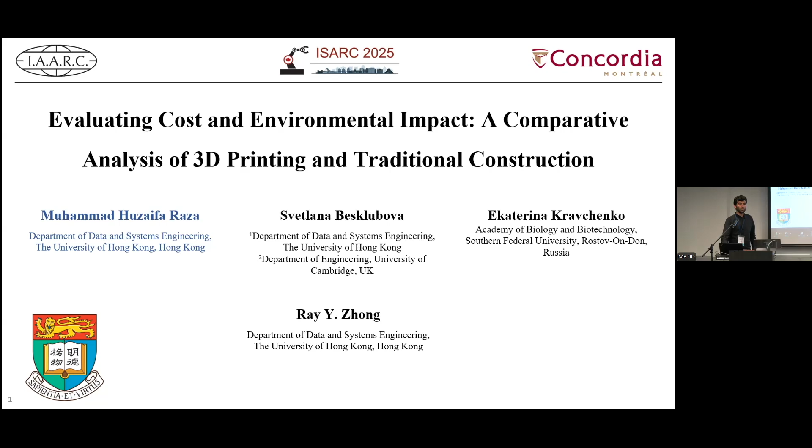Okay, the title of my presentation is Evaluating the Cost and Environmental Impact, a comparative analysis of 3D printing and the traditional construction. My name is Muhammad Huzaifa Raza, and my co-authors are Dr. Svetlana and Dr. Ekaterina and Professor Zhong. So let's move toward the contents of the presentation.

Generally, 3D printing is regarded as cost-effective and environmentally friendly. But the scenario is a little bit different when we consider the whole supply chain, starting from the raw material supply to the final construction and disposal stage. So that's why, apart from the other studies, we have considered the whole supply chain from the material supply to the final construction.

So the contents for this presentation would be the research background, the motivation for this study, research methodology, what kind of data we use and what kind of analysis we have conducted, a case study, where we have validated our considerations using a real-time case study, discussion of the results, then the futuristic scenario, whether it could be beneficial in future or not, and then the conclusion of the research.

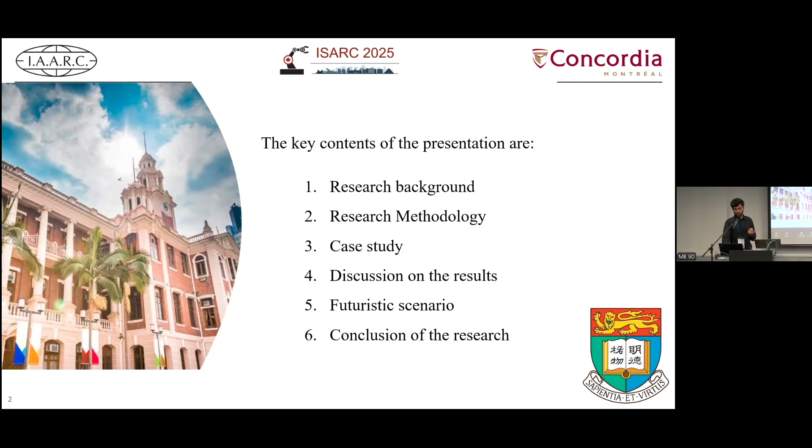So generally, why we are moving toward 3D printing is because traditional construction is cost intensive and even resource intensive. Like 40% of the natural resources are consumed by the construction sector, and nearly 40% of the GHG emissions are produced by the construction sector. So in this regard, 3D printing has the potential to reduce the cost, material consumption, and even the greenhouse gas emissions, as reported in previous studies.

So what are the benefits of 3D printing? It's the shorter supply chain, because it produces self-supported layers. That's why we don't need any type of formwork. The formwork also has its long supply chain, for example, the manufacturing of the formwork, then the transportation, then the assembling and disassembling process after the construction. So the entire supply chain for the formwork is eliminated in 3D construction printing. That's the clear benefit over traditional construction.

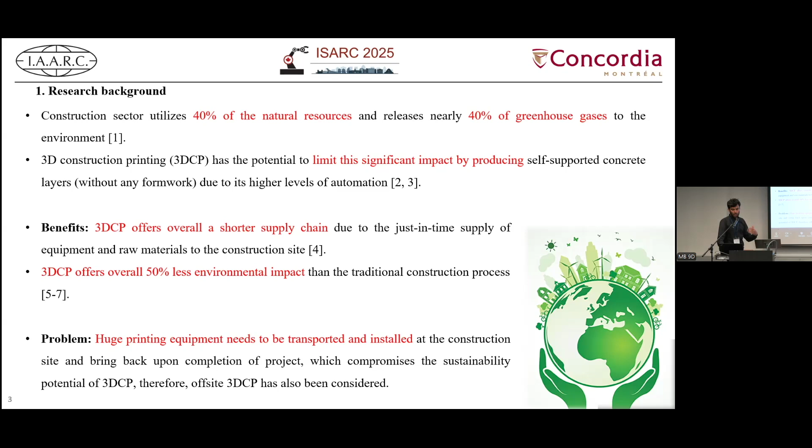But what are the challenges associated with 3D printing? That's the transportation. For example, if we have to construct a small house or small structure on the construction site, we have to move the entire setup for the 3D printing, assemble it on the construction site, and after the construction disassemble it and transport it back to the constructor's site. So keeping in view these challenges, we have considered the entire supply chain, starting from the raw material up to the final construction and the waste disposal phase.

So in this case study, we have considered two cases. One is the traditional construction. Here you can see traditional construction is quite smooth; it has only one-way transportation. But when we consider 3D printing, we have two-way transportation for the equipment and one-way transportation for the material. Why? Because, as I discussed previously, after the completion of the construction we have to move the entire 3D printing setup back to the constructor's site. So this is the whole supply chain that we have considered for the comparison of both cases.

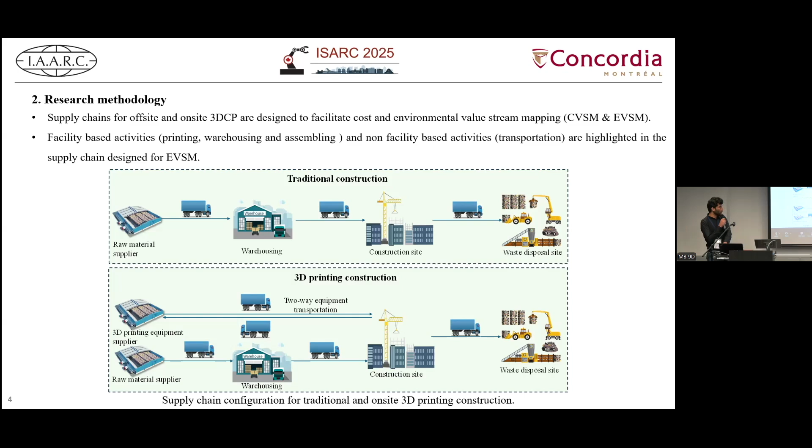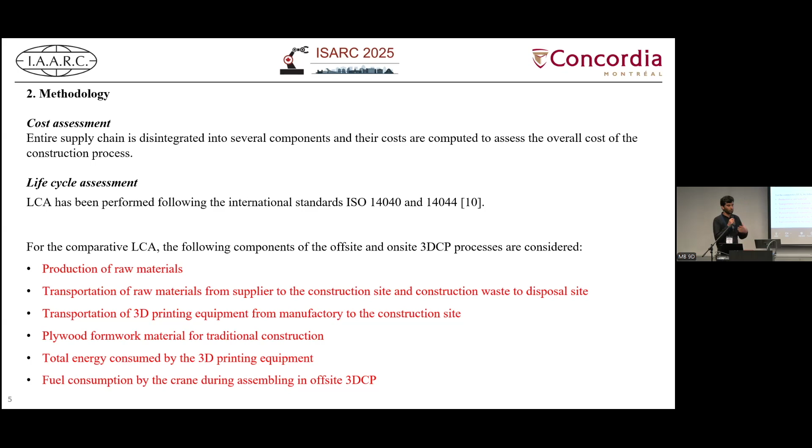So considering the entire supply chains for both, we're going to perform the cost assessment for both methods and the life cycle assessment. For the life cycle assessment, we have considered the production of the raw material, the transportation of the raw material, transportation of the equipment and back to the supplier, the amount of energy consumed, and even the fuel consumed by any type of equipment used during the 3D printing.

Here's the 3D printed house that we have considered as our case study. And we have also considered the same type of house, also built in Germany, that has nearly the same area, but a different amount of material is used because that method is totally different. So that's why the material consumption is totally different.

So this is a two-story building that was constructed back in 2020. This project was supported by different stakeholders: design firms, the material supplier, the equipment supplier, the construction firm, and even the research institute, Technical University of Munich.

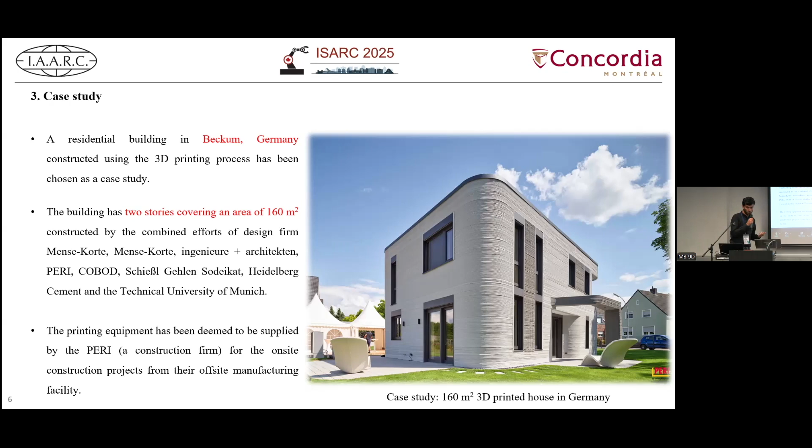So considering how we collected the data: first of all, we segregated the entire supply chain into the different phases, for example, raw material supply, transportation, construction, and then disposal. So we have segregated each process into several sub-processes according to the existing research.

And then we collected the data through questionnaires from the operational level employees of the project. Then we had follow-up interviews to fill in the missing information that we needed. So here's the information: a small portion of the information we collected through the interviews, and some of the information we collected from online sources.

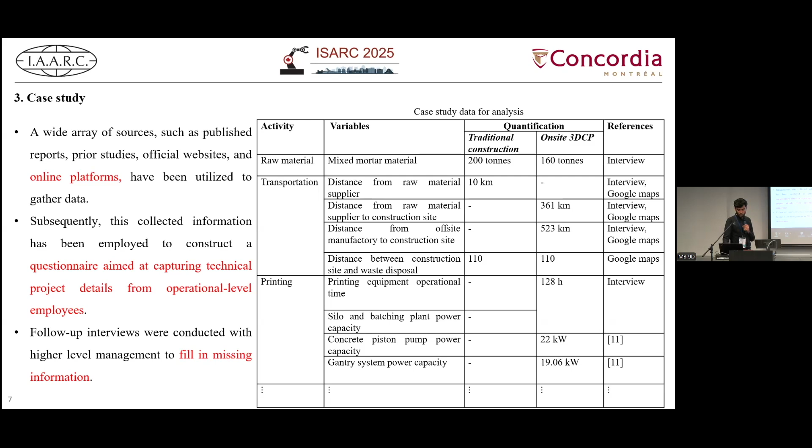We have provided the references because some of the data is commonly available, for example, the power capacity of the equipment, and the distances can be measured through Google Maps. Actually, we collected the data for the locations, and then we converted them into the distances for the raw material supply and others. So here's the results.

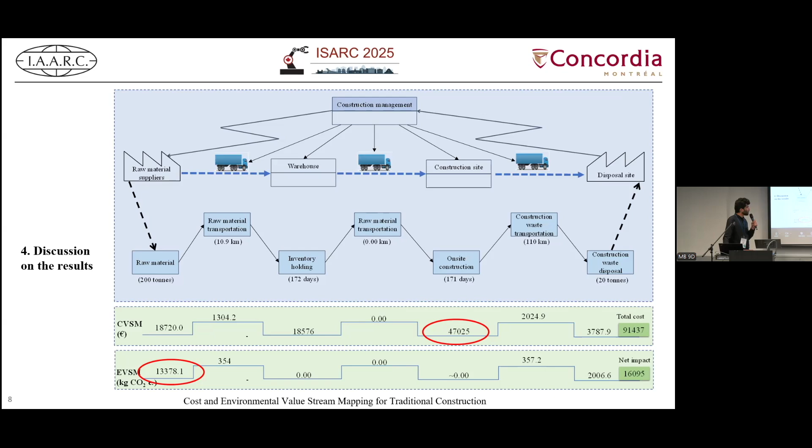The reason is that it's a small scale construction, a two-story house. When there is a small scale construction, we don't use heavy equipment, so most of the operations are performed manually. That's why the cost is quite high, but the environmental impact is quite low at the construction phase. But when we consider the raw material phase, a huge impact is created by the material used. This is the case for traditional construction.

So there are a little bit different results in terms of 3D printing. Here you can see the potential impacts are created by the transportation, because there are huge distances involved, from the material supply and the equipment supply. That's why the impact and the cost are too high in terms of transportation.

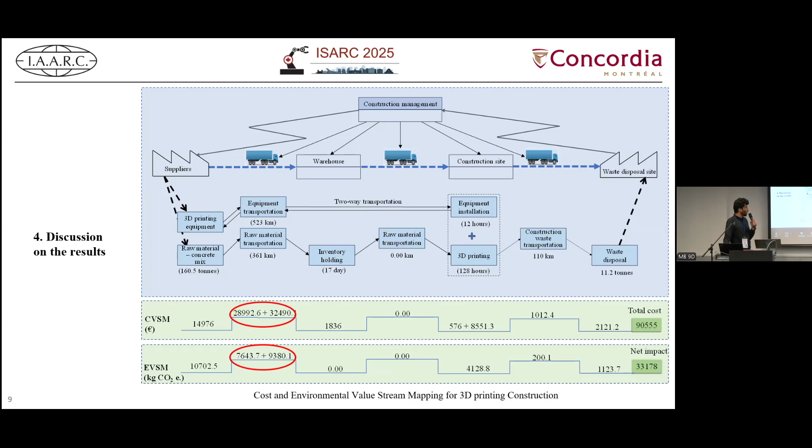So here we consider a futuristic scenario: whether it could be beneficial if we reduce the distances. We have seen the locations or sites of the construction firms in Germany. These yellow icons are the construction sites, so it means these construction firms are available within a 100-kilometer radius.

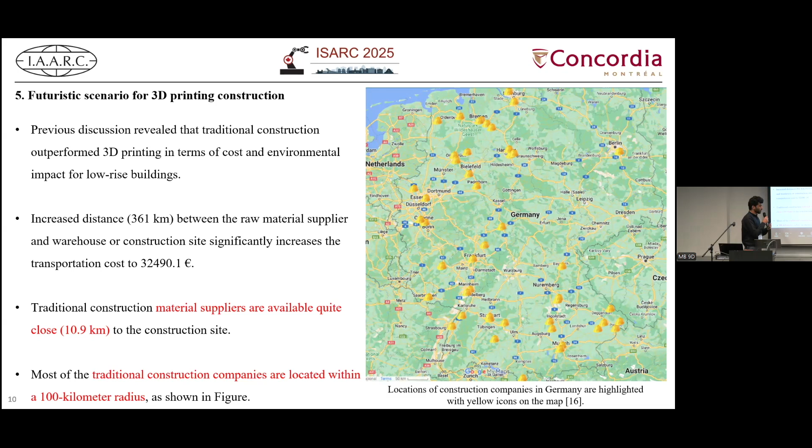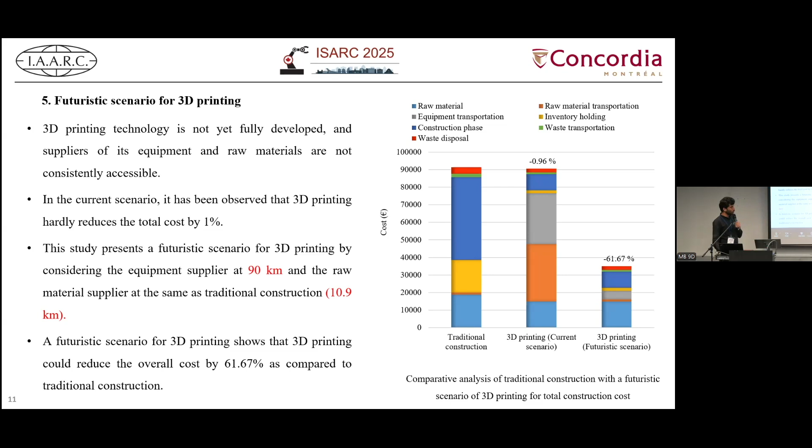So if all the construction firms in the future, maybe 20 or 30 years later, are adopting 3D printing, the equipment and the material are available within a 100-kilometer range. So what could be the scenario? Here's the scenario we have considered. In the futuristic scenario, 3D printing could potentially reduce the cost by nearly 60%. And the environmental impact, which initially was 106% higher compared to traditional construction, could be reduced to only 10% higher.

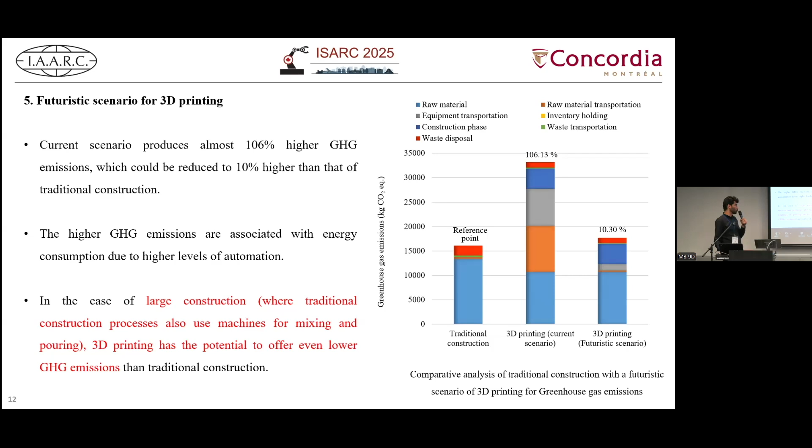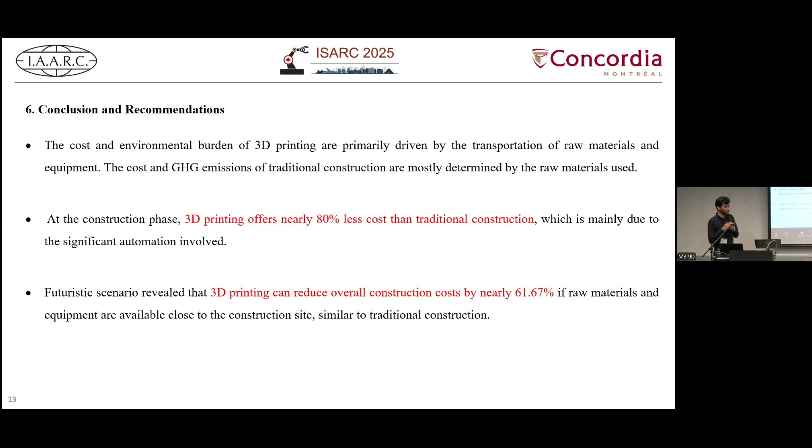So here's a key conclusion. The cost for traditional construction is mainly caused by the material, but in terms of 3D printing, transportation is the main source. However, this cost could be reduced by up to 61.67% if 3D printing is adopted by most of the construction firms in the future.

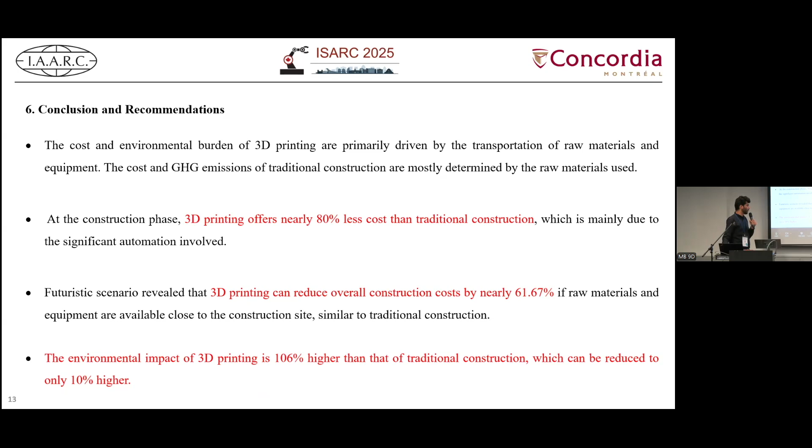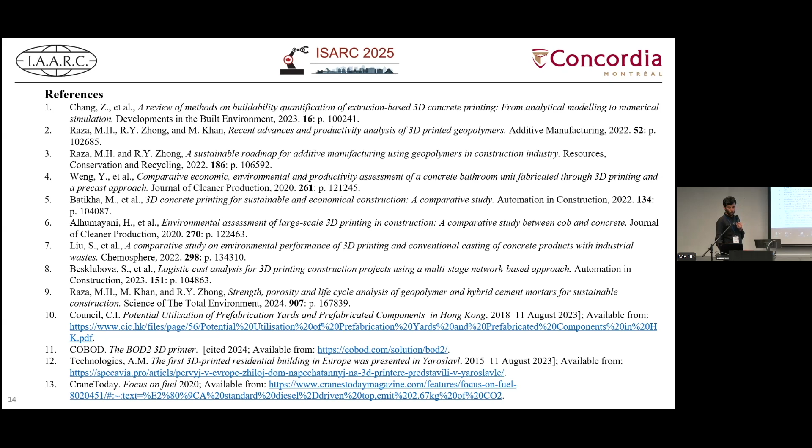Still, the environmental impact is higher. Why is it higher? Because it was a small scale construction, where compared with traditional construction most of the operations are performed manually. That's why this impact could remain higher for 3D printing. But the scenario could be different for large scale construction, when traditional construction also uses heavy equipment for material supply and other purposes.

So that's all. If you have any questions, feel free to ask.